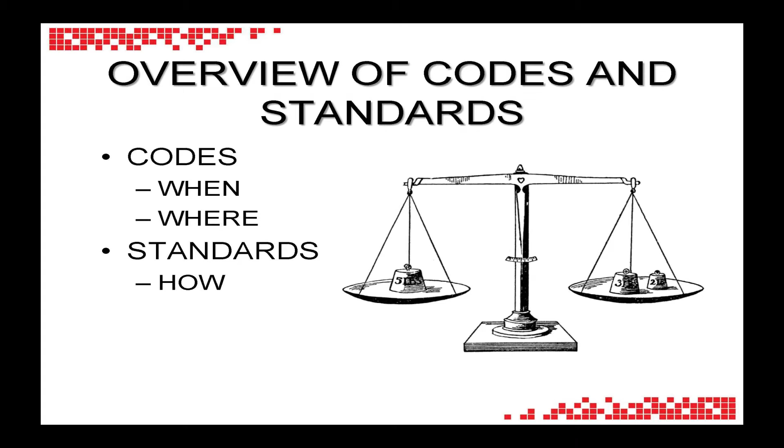One question I always get is when and where smoke control systems are required. I wanted to go through how we determine where these smoke control systems are required in our buildings that we're building in the UAE, Abu Dhabi, Dubai, and even these super tall buildings going up around the world. One distinction I always get is, well, where is it required?

Where can I find the requirements for smoke control systems? What I've seen is a tremendous step in the right direction here in the UAE with the adoption of formalized fire codes. The next step is to get to the next layer of clarity and informing building designers on how to find these requirements.

So I'm going to tie this back into NFPA because that's what I know and that's what I'm familiar with, and compare it to what we see throughout the region.

When we're trying to find out what the requirements are for smoke control systems, we find out what documents are going to tell us what's required, and that's when we come into a whole list of NFPA codes and standards. To clarify, the codes are the overarching documents that tell us when and where systems are required, as opposed to the standards, such as NFPA 13 for sprinkler systems, which tell us how to design and install such systems.

As an example, NFPA has a number of different codes and standards, but two of the primary codes would be NFPA 5000 and NFPA 101.

Now, when I first moved out here 5 years ago and started working here 8 years ago on certain projects, everything tied back to NFPA 101. That was the standard of life safety in our buildings.

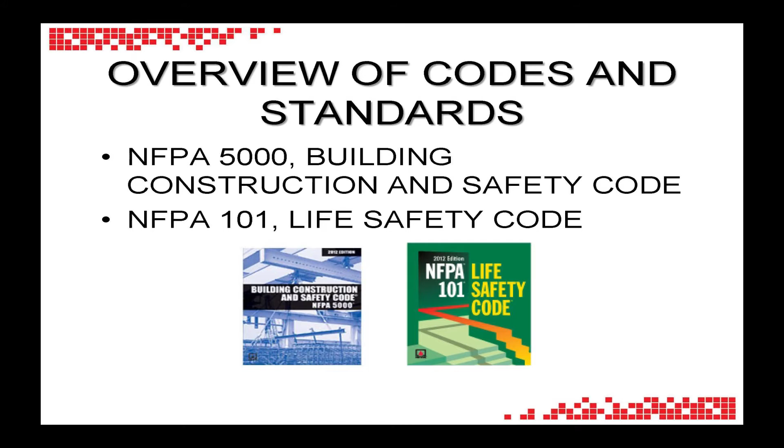So in these codes, it gives us a scope. What is this code really intended to do? I wanted to highlight the difference of the scope of a building code as opposed to the scope of a design standard, so you can see these are the overarching requirements.

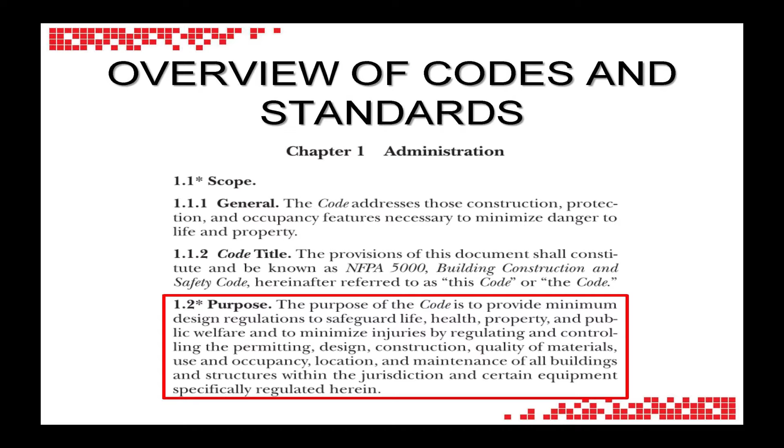So here, this is the scope of NFPA 5000. Whenever I'm not familiar with a code, or a code I haven't used in a while, or a standard I haven't used in a while, I always look at this upfront section to see, is this the right one to be used? Well, if we're going to start developing a building strategy, you first start with Chapter 1 of NFPA 5000, which will tell you when it applies to your building.

What you'll see in the purpose here is that this code provides minimum design regulation to safeguard life, health, property, and public welfare. And where does it apply? Well, it applies to all buildings and structures within the jurisdiction. So that's pretty clear that if we're designing a building, this code does apply.

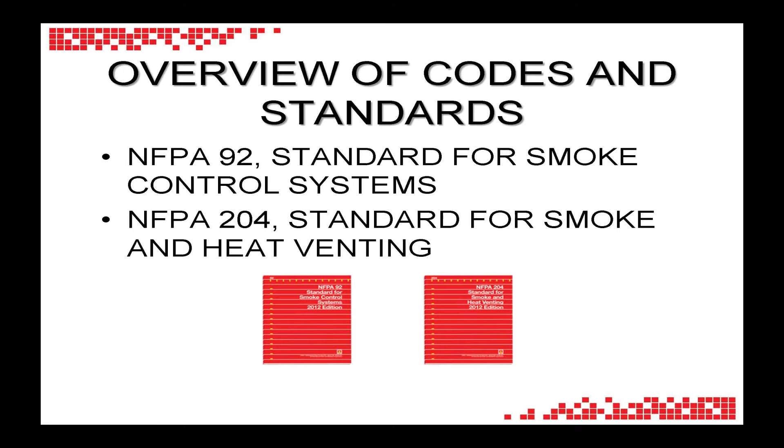Now I wanted to compare that to a typical NFPA standard. Since we're talking about smoke control, I've highlighted the two primary smoke control standards, which is NFPA 92, standard for smoke control systems, and NFPA 204, standard for smoke and heat venting. Here, if you identify in the scope of this document, you'll see that it says the requirements specifying the conditions under which smoke control systems shall be provided are addressed by other codes and standards.

So we'll typically be in a debate with an individual and saying, well, what's required and what's not? And they'll say, well, NFPA 92 requires a smoke control system. Or really it's the other way around, whereas NFPA 101 or 5000 would require the system, NFPA 92 would just tell you how to design and install it.

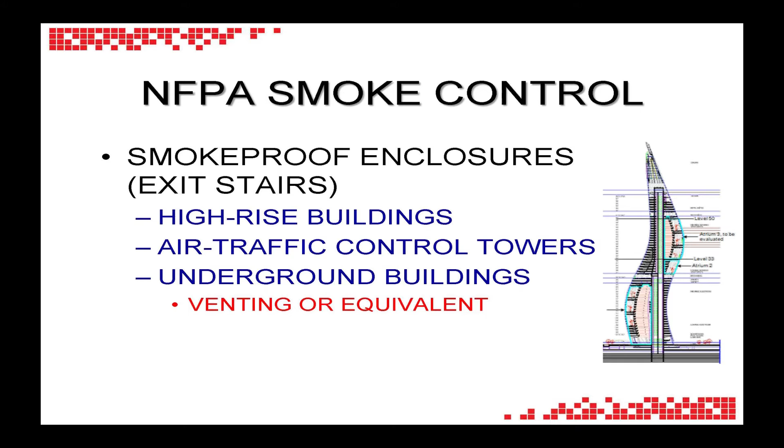So if we go to NFPA 101 and 5000, what systems then are required under a typical NFPA fire strategy? Well, you'll start with your smoke-proof enclosures. Those are probably the most predominant smoke control systems that you'd find in NFPA. Smoke-proof enclosures are for your exit stairs, typically in high-rise buildings, or unique occupancies such as air traffic control towers, where you might only have a single stair, or where you have underground buildings where we want to prevent smoke from following people up a stairwell.

We want to prevent smoke from getting in there, so you can either do the smoke-proof enclosure or an equivalent venting arrangement at grade.

The second type of smoke control system you'll commonly see in NFPA 5000 and 101 are smoke management systems. These systems are really intended to maintain tenable conditions in certain areas of the building so that people can escape.

So you find this in areas where you have legitimate stages. This here wouldn't be a legitimate stage, this is just a platform. Whereas if this was a performing arts theater, where you have larger combustible fuel loads and people in the audience, that's when you would require venting of the stage if scenery had ignited, or require exhaust in that area. An alternative to that would be smoke-protected assembly seating.

If you can't just protect the stage, you protect all the audience as well. What you're doing is exhausting the smoke produced by the fire at a rate that keeps it above head level, in which case you are deliberately maintaining tenable conditions for a certain duration.

The last area is for atrium spaces in malls where you have large floor openings, where you want to protect people that aren't directly involved with the fire. So you might have a fire in a retail shop, but the people being exposed to the smoke are the people on an upper floor, where more volumes of smoke reach and accumulate in that upper layer. You want to allow those people to escape because they might not readily know that fire is going to affect them.

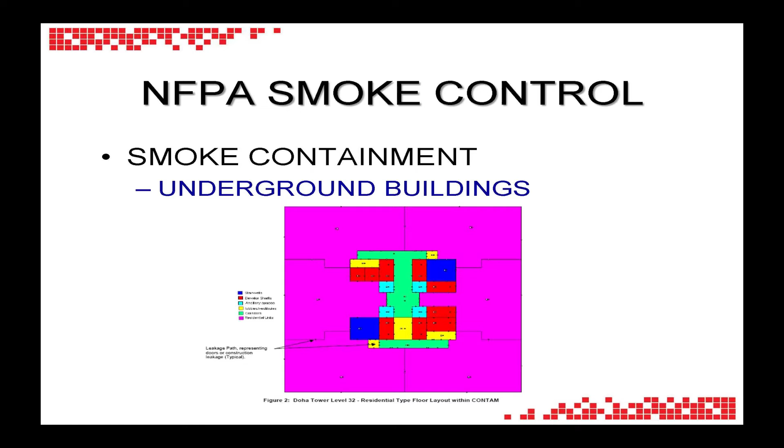The last kind of smoke control system you'll find in NFPA is a smoke containment system. This isn't really intended to maintain tenable conditions, but is intended to prevent smoke from spreading to adjacent areas by overcoming the pressure of the heat of the fire.

Under NFPA, this is really only required in underground buildings, where you don't have other means to let smoke escape the building, such as through exterior windows or breaking windows due to flashover.

So, not to be confused, there are other mechanical systems we use to ventilate our spaces, but these are more just ventilation systems, not falling under the regime of smoke control. So you'd have hazardous and special use ventilation - for example, our generator rooms and pump rooms need to have ventilation rates.

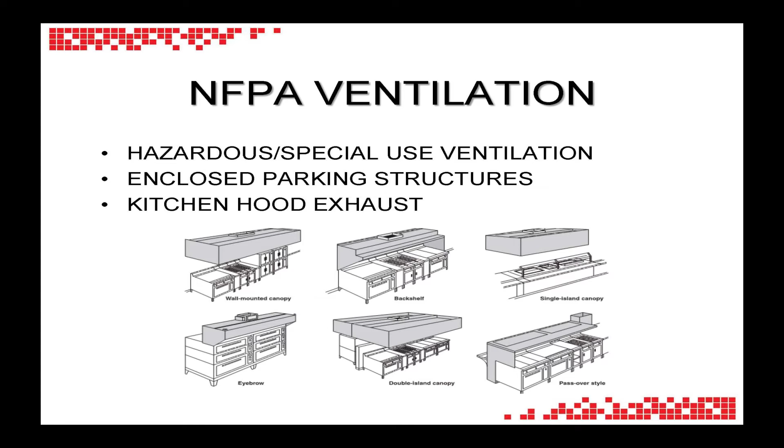Enclosed parking structures, again, it does serve as ventilating smoke from the space, but it's really just a ventilation system falling under other NFPA standards, NFPA 88A or NFPA 90A. And then we have our kitchen hood exhaust systems, which would again fall under the kitchen standard, not to be confused.

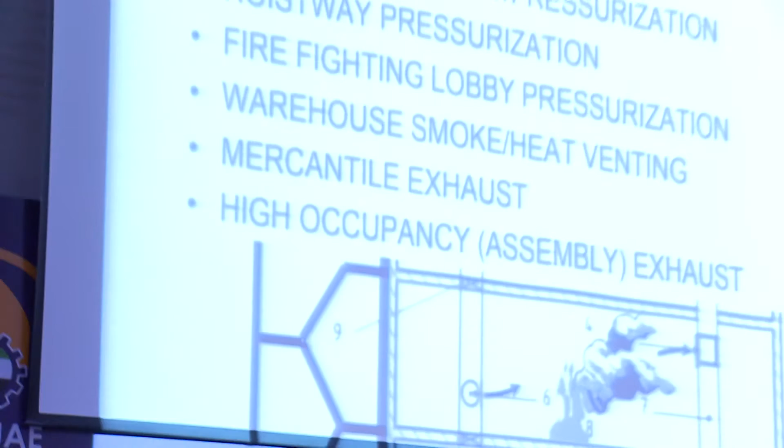So the confusion arises when we're developing these fire strategies and start adding various complexities to our smoke control strategy. A number of systems we see that aren't required by NFPA would be corridor exhaust, corridor pressurization, hoistway pressurization systems, firefighting lobby pressurization, warehouse smoke and heat venting - plain mercantile occupancies that don't have floor openings are not required to include a smoke control system.

And just because a room has a lot of people in it doesn't necessarily mean you need a smoke control system.

Well, why not? Wouldn't it be better to have all these smoke control systems? Well, that's what I'm here to present really today - why not? And why does NFPA not include all these other detailed systems and other detailed requirements?

In summary, because NFPA has identified that there are better alternatives that we already use in our buildings. But to understand the intent of these other alternatives, they also play a role in our smoke control strategy.

Additionally, active smoke control systems have a lot of assumptions, primarily regarding leakage rates. So even in the design phase, we need to assume whether a wall will have leakage through it or not. And then through the design phase, we need to make sure it's specified correctly, and then built correctly, tested correctly.

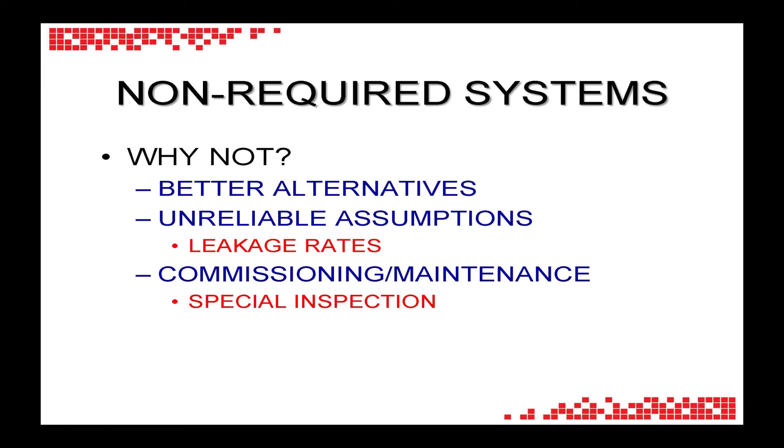And beyond that, there are changes to buildings, and no one's going back and redesigning the systems when you might have an electrical conduit you want to put through the wall. But the subcontractor is not a fire stopping contractor, so he just puts his conduit through a wall, and now you have additional openings, which aren't taken into consideration.

In addition to that is the difficulty of commissioning and testing smoke control systems.

NFPA identifies a few different types of systems and features in your buildings that need special commissioning and testing: your structure, spray-applied fireproofing material, and smoke control systems. The reason is because smoke control systems are so complex and involve so many different people that there's a lot of areas that can go wrong.

To commission a smoke control system, you typically need your fire protection engineer, air balancer, general contractor, fire alarm subcontractor, mechanical subcontractor, door hardware contractor, and typically an agency to manage the whole process so that people aren't opening and closing doors, and that the rooms have been integrity tested, and so on.

So with these complexities, I want to share some of the better alternatives already identified in NFPA and bring awareness to the differences between these alternatives and when they're typically used. The biggest and best alternative that we found through research and previous fire statistics in the United States is sprinklers.

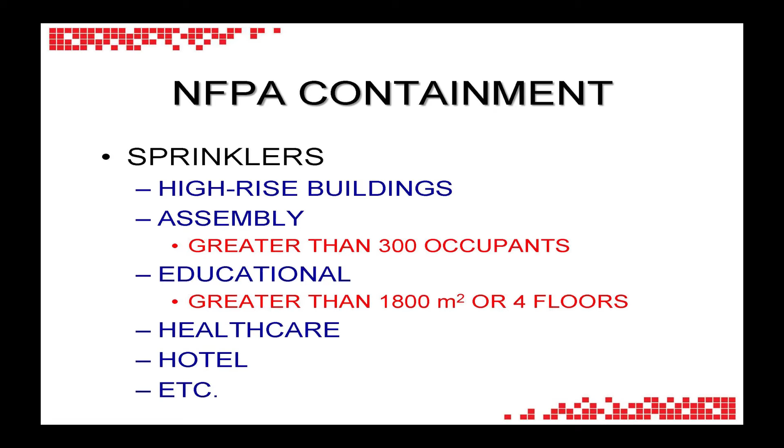Sprinklers provide the best form of smoke control in your building. If your sprinkler system works, it does a number of different things, and it's already required in most of our buildings.

All high-rise buildings now need to be sprinkler protected. Assembly areas with large occupancies, more than 300 occupants. Educational occupancies basically larger than a villa. All new healthcare in the United States needs to be sprinkler protected. All hotels need to be sprinkler protected, and so on.

The benefits of sprinkler systems are typically that they're monitored, so we have our flow switch that tells us if there's actually a fire in the building, and they can provide occupant notification to get people out quickly.

Also, they provide suppression. Smoke development is basically directly related to mass consumption - however much fuel is burning, that's how much smoke will be released depending on the material. So we can limit the mass consumption, limit the smoke yield, and limit the heat, which by limiting the heat, we can limit the pressure created in the room, limiting the amount of smoke forced out of a room. So I have a very simple example.

This is a healthcare facility that we worked on here in Abu Dhabi. I'm going to show you the layers we've added to our smoke control strategy that would typically be required in NFPA. The first layer is we're going to add our sprinkler protection throughout our facility.

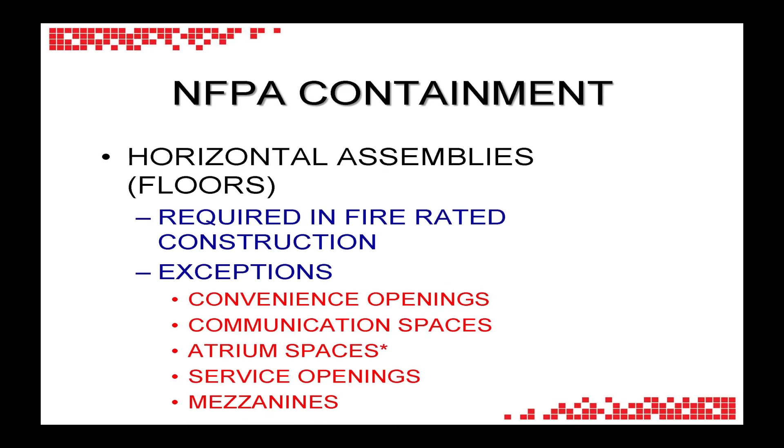This type of containment is required to be continuous, so you don't form gaps in your protection. They're supposed to go from exterior wall to exterior wall, or they can terminate at a smoke barrier, meaning they can run vertical for an extended portion of time and then come back horizontal, but protected from smoke. They're required to be constructed as smoke barriers so that smoke cannot go through the floors, and any openings in the floors must be protected by either fire-rated joints or a ceiling radiation damper, or any openings need to be enclosed in shaft construction. So they have a fire rating that is vertical.

So if we go to our typical healthcare building and add our containment for horizontal assemblies, you can see we're now starting to surround any potential fire and any smoke that would be developed by that fire by creating a barrier at the floor slabs.

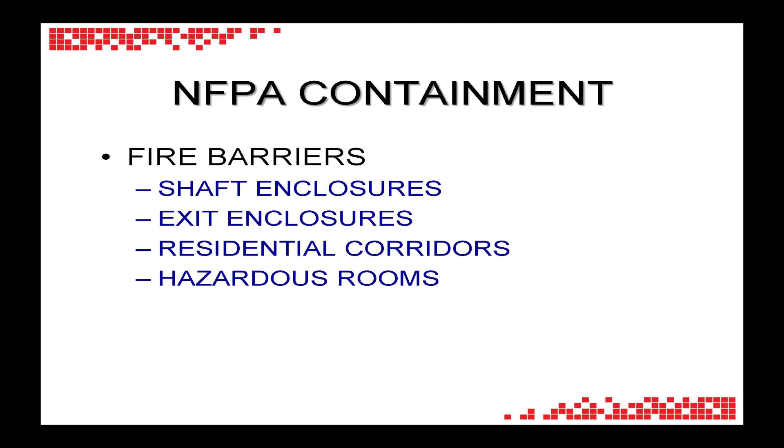The next item is fire barriers. Fire barriers form most of your vertical fire-rated assemblies in your buildings. They're typically intended to be used in shaft enclosures, for our exit stairs and exit passageways and enclosures, required for residential corridors, and typically required for hazardous rooms where a fire rating is required - so fire pump room, generator room, fire command center.

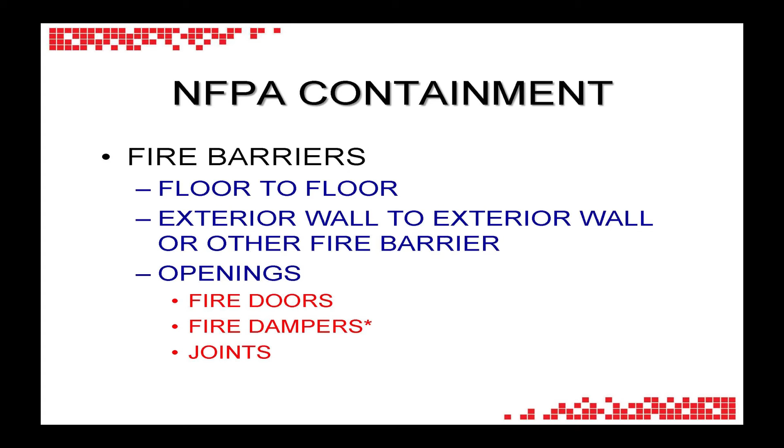And again, these fire barriers have to maintain continuity. They have to be continuous from floor to floor. Or, if you're looking in the other direction, from exterior wall to exterior wall, or they need to be connected to another fire barrier, and that other fire barrier will have to meet the same requirements, exterior wall to exterior wall, or to the next fire barrier.

In addition to that, all these fire barriers are required to have opening protection. So you're required to have appropriately fire-rated doors, and those doors, unless meeting specific occupancy chapter requirements, are required to be self-closing. And then we have fire dampers in these fire barrier walls wherever they are a non-ducted system or where the wall is greater than 1 hour. In addition to that, you're required to have all your joints being fire-rated as well.

So if we add to our example now the fire barrier component of our containment strategy, now we have a storage room, which is 1 hour fire-rated if it's more than 9 square meters, roughly. Or what we'll have is our exit stair enclosure or shaft enclosures, which in a 2-hour building would be 2-hour fire rated. So we've gone from our floor slabs, and now we've created the continuous 2-hour compartment for our floor.

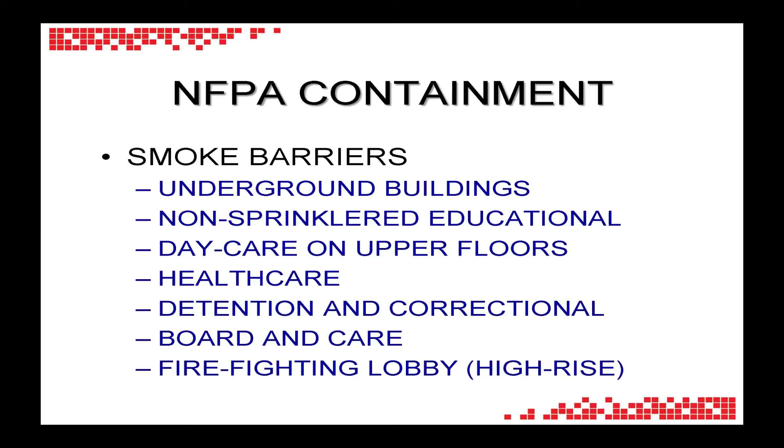The next item, which is getting into the next layer of protection, and is something that we don't see very often in the region, is the distinction between what is a fire barrier versus what is a smoke barrier. Smoke barriers have very specific functions in our buildings, and typically they offer one level higher degree of protection compared to a fire barrier because they're also intended to protect against smoke. What you'll see is smoke barriers are required in buildings such as underground buildings, non-sprinklered educational occupancies, daycare buildings on upper floors of your building, healthcare, detention and correction, board and care, and firefighting lobbies.

Now, what do these all have in common? Well, all of these occupancies typically have a defend-in-place strategy where you want people to wait on a fire floor because they can't evacuate vertically, they can only evacuate horizontally. So we want to protect them against that smoke. For healthcare, where you have bedridden patients, they may be conscious or unconscious, or may not be able to leave their bed, they can't take the stairs. So they have to evacuate to the other side of the building, and they need to be separated from the potential fire and smoke by a smoke barrier.

Again, smoke barriers need to be continuous, similar to the fire barriers, and their openings have additional requirements. So as I said, not all smoke barriers must be fire rated, even though most of them are fire rated.

So openings are required to be protected by not just fire doors, but fire doors that are also designed to protect against the spread of smoke. Any duct penetrations through these and any air transfer openings not only need to be protected by a fire damper, but a combination fire smoke damper.

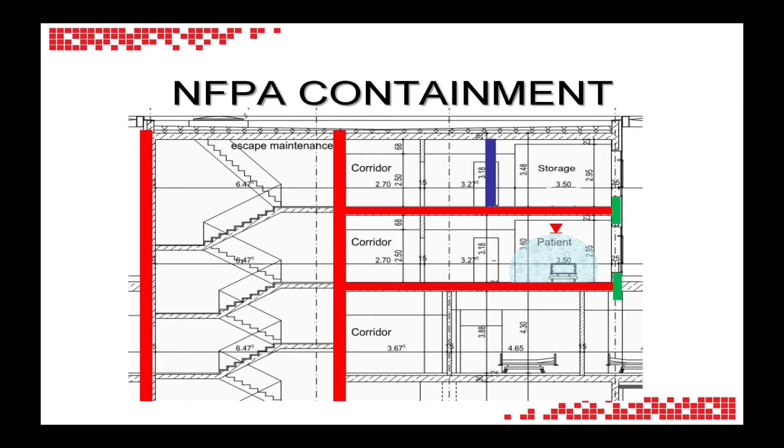So if we take our horizontal floor slabs, our fire barriers, for a healthcare occupancy we're required to separate our building into zones - 2,100 square meters is the maximum zone size. So we'll have some form of barrier that runs perpendicular to our rooms. In plan view, it would be a barrier that basically separates two halves of a building, so that if there's a fire in one half, you move everyone to the other half until they can be evacuated via lifts when deemed safe, or they can wait until the fire is extinguished.

And the final layer of complexity is for smoke partitions. Smoke partitions are a lesser degree than fire barriers and smoke barriers. They're only really intended to prevent the spread of smoke, so they're really just the first line of defense in our smoke strategy.

Typically these are required for corridors to make sure that patients or students in other rooms but in the same compartment can at least get to the corridor to get to that smoke barrier before the smoke gets out of the room. So it's not really intended to prevent the fire from going from one area to the next - it's intended to give a little bit more time for people to get out.

And what these barriers do is offer us the best of both worlds. It's a compromise on making sure that we have nicely designed corridor walls, we have visual cues - they can be glass, they can have mail slots, they can have pass-through windows for healthcare. So they offer us functionality in our building, but also give us that layer of defense so that once the fire initiates and smoke starts to spread, it contains it in that room until everybody in that area can get out of the building.

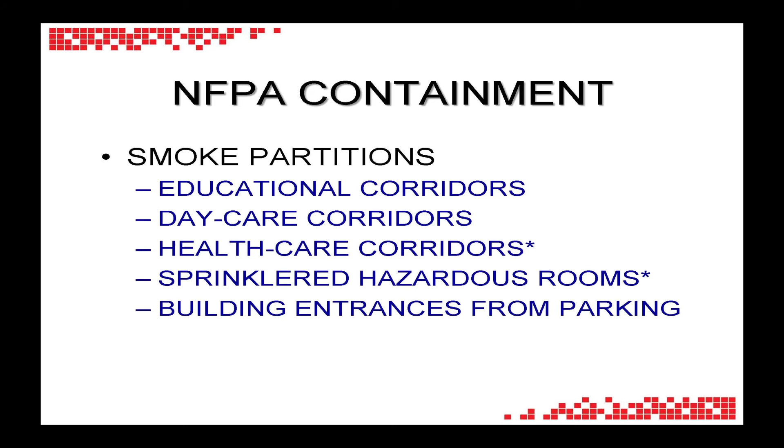We all go to our malls, and we all see that there are requirements for retailers to guide people into the mall, so you have nice glass doors - you can see this in malls in Dubai and Abu Dhabi. And these glass doors, under NFPA, would require to meet the requirements for a smoke partition - non-rated, but smoke tight.

And again, these have requirements for continuity, except these ones can terminate at a smoke-tight ceiling, again for corridors. If you wanted to run services above your corridor, you can just create the outline of your corridor going from the wall up to a smoke-tight ceiling and then back down to the other side.

And then openings are less strenuous than what they'd be otherwise - they don't particularly need a fire rating if the wall's not fire rated. But doors, for example, can't have louvers on them. You require smoke dampers in certain areas - sometimes you would not if it's a ducted system, for example, but if it's just an opening in a wall, then it would need to have a damper. And then smoke-tight joints and penetrations without necessarily the fire rating.

So in our healthcare occupancy or similar education occupancy, where we need to have that first line of defense, we'll add our smoke partitions - non-rated, meeting the requirements of the health authority, but also meeting the needs for evacuating patients to the next compartment. So we pull everything together in an NFPA smoke control strategy.

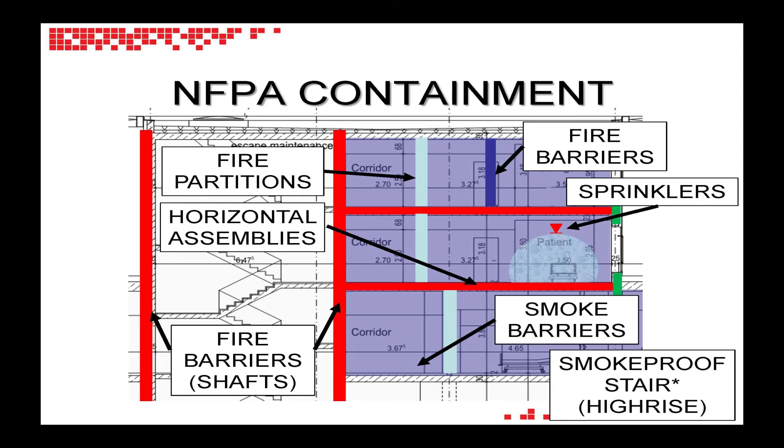This is really the strategy as a whole. We have our fire partitions protecting our corridors, our fire barriers protecting our vertical exit routes and our hazardous rooms, horizontal assemblies protecting floors above and below. We have our sprinklers trying to suppress the fire, slow the growth, and give civil defense more time to get to that fire. And if we're a high-rise building, then we also require to pressurize our stairs. But that's it - that's the whole smoke control strategy.

And if done correctly, we've shown in the United States it works very well. And the biggest contributing factor to that is the sprinklers.

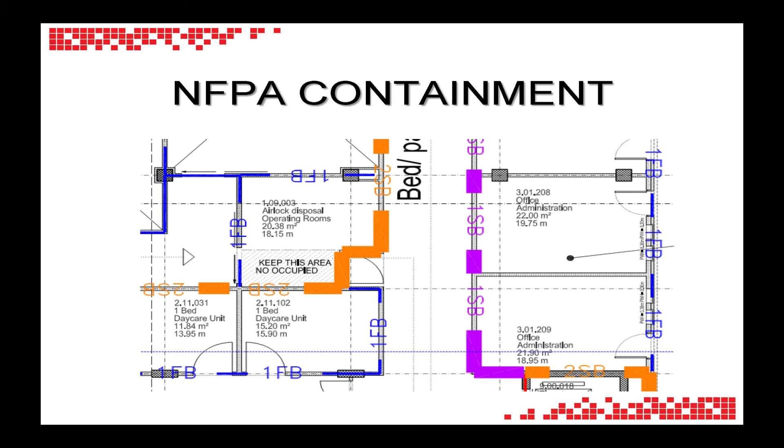One thing we've started showing on our plans to identify where we have a fire barrier, a smoke barrier, or smoke partition is the use of one more layer of designation of walls. For example, you'll have a 1-hour smoke barrier shown in purple on the right-hand side of the corridor because that's the routing of our smoke zone.

We have a 2-hour barrier on the left side of our corridor because civil defense wanted us to increase the fire rating of our operating theaters, which were on the left-hand side of this plan. And then we have corridor designations, which not only tell you what the wall rating is, but also tell you how to protect all the openings and joints.

How to successfully implement a smoke containment or smoke control strategy. So again, if we look at the comparison of all the available systems versus what would be required under NFPA, you can see there are many more systems available, but NFPA wouldn't necessarily require them.

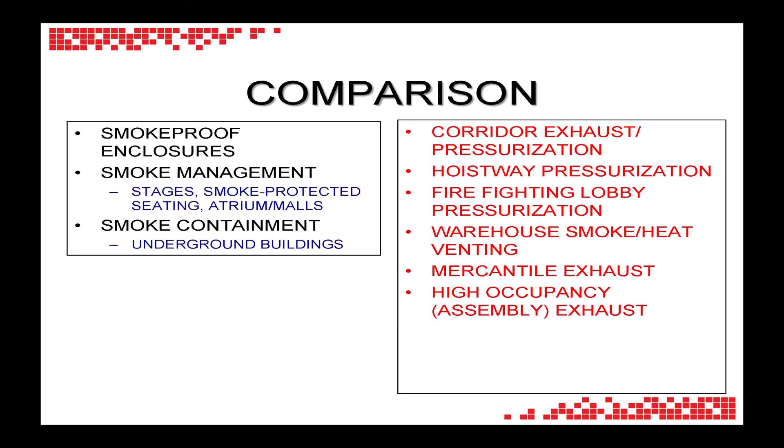Instead of focusing on all the other systems that could potentially be implemented but are more difficult to implement, NFPA simplifies it into: let's make it passive, let's focus on the physical construction and make sure that component works before going to complicated, detailed smoke control systems that require numerous parties, a very well-coordinated design, installation, commissioning, and constant retesting on any building modification.

The last item I put on the asterisk is also, obviously, interior finishes. If you go back to, for example, the MGM Grand Fire, that was a big interior finish and non-sprinkler protection issue, so that also plays a role as well. I just don't see as much of an issue with that in our construction.

So I hope that sparked some ideas, and I look forward to debating the various strategies for smoke control or discussing them in further detail. Thank you.

Many thanks, Aaron. A lot of information there. Not easy to sum that up, but I think there's a couple of subtle things that jumped out at me.

One of the things is that the codes are minimum requirements. I think in a lot of cases we look at meeting the requirements of the codes rather than exceeding them. And I think that fire safety engineers, fire safety engineering companies, can help a great deal with not only meeting but exceeding and tailoring requirements.